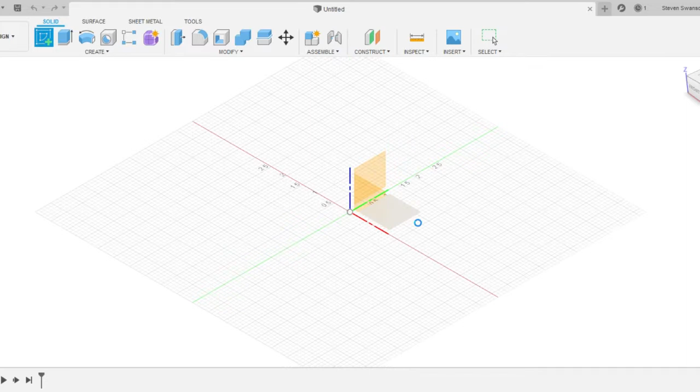Now I'm in Fusion 360. This is sped up, by the way, like 4 times because there was some lag, so this is actually slower than I'd really like. This is sped up to the maximum speed that my software allows me to.

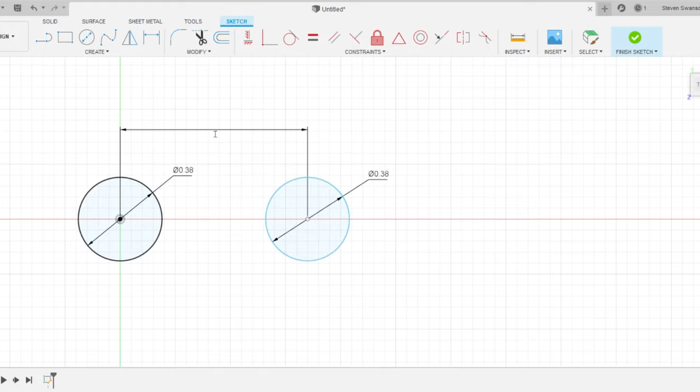And here I am making the circle, the original circle that is going to be the hole. I think I said 0.38, that's what I'll make it. You see I made it 0.38. That gives it just enough room so I don't have too much friction.

I made 2 of them because remember I'm gonna have 2 sticks, so I made the 2 holes. I put them a 1/2 inch apart, that gives them some space. I didn't really care how much space exactly, I didn't really plan that, it just looked nice at this size. So they're 1/2 inch apart, those 2 circles.

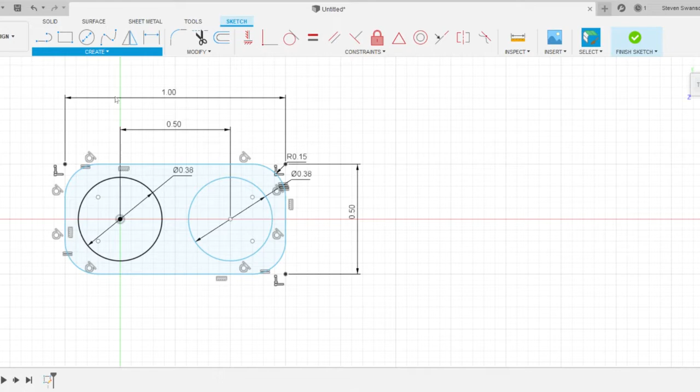I made the outside rectangle, now I'm rounding those edges. Remember that's called filleting, when you round those edges. It just looks more professional rather than a squared edge. You should always, unless you have a reason, round those corners, just like on a coffee table - they're not sharp edges, they're always slightly rounded.

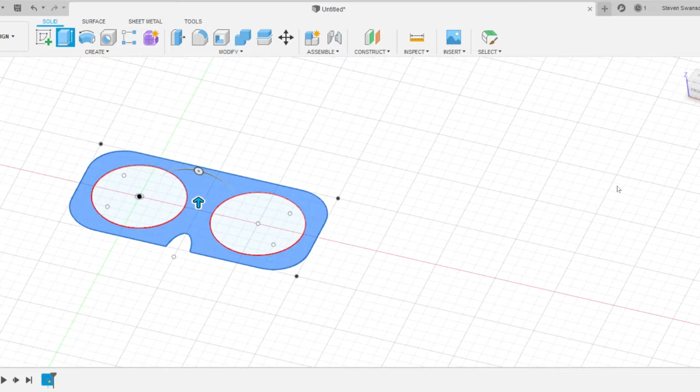Here I'm just trying to make a notch because I remember there was a groove in the middle of that little railway, so I put a little groove there. I could have measured it, I should have, but I just put it there and it just looks nice. So I put that groove, that's where the bottom is going to be.

I made it into 3D. That's called extruding, so you take your drawing and then you extrude it out, which kind of puffs it out. That's called extruding in 3D software.

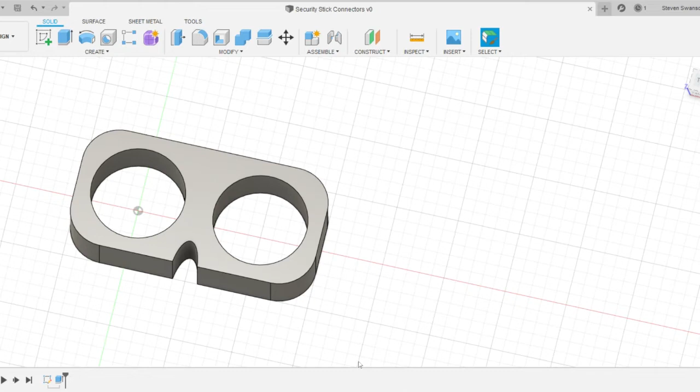And I think I'm about done. I don't think I did much else. I know I had to save it, so I think that's what I do. I have no idea what I'm doing at this point. Trying to remember why I'm spending so much time on this.

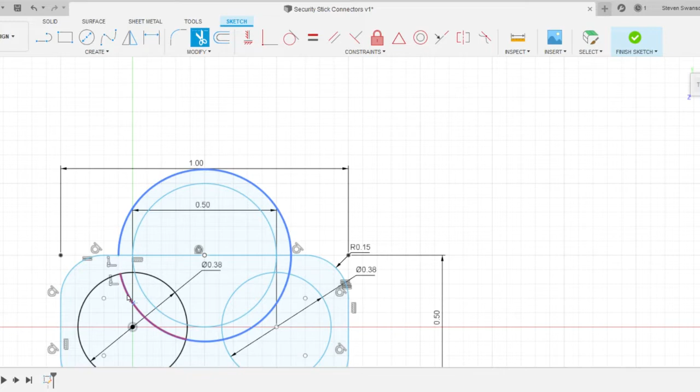Oh, I know, I had to go back and edit something. What did I do? Let's see here. Oh, no. So I saved that file, and I saved that last file as the connecting pieces. Now I'm messing with that file and doing the end piece, the final end piece.

So I'm adding that little handle on top, so that's kind of like what I was going for. But I thought, maybe I should have something that sticks out, like pops out a little bit more than just a loop. I think it ends up breaking off anyway.

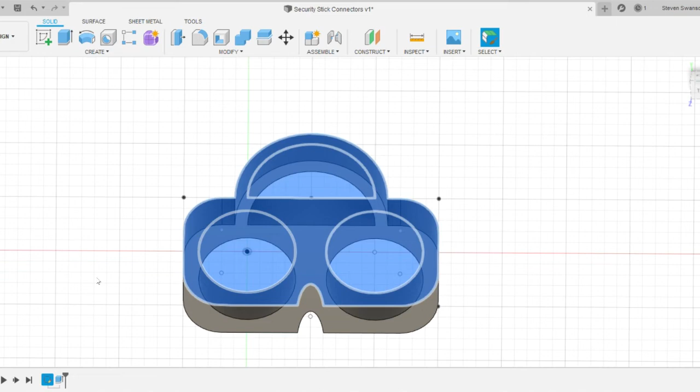It's very tiny. I remember while I was drawing it, it said it was going to be around 0.1 inches, that's 1/10 of an inch, that's not very big at all. In fact, this whole thing looks big here in the drawing. It's really small, and you'll see them in a minute when it prints them and when I have them in my hand.

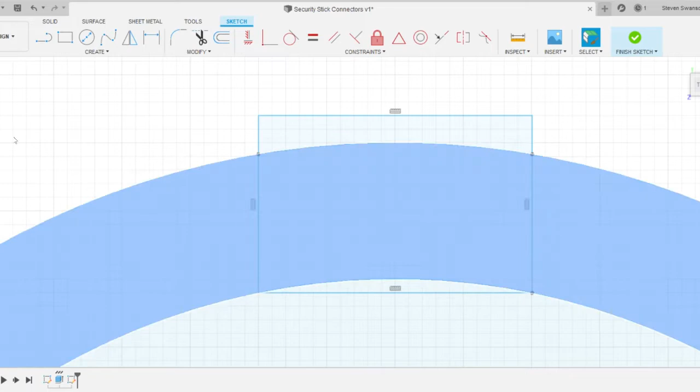You can zoom in here and they look giant, but what do they look like in real life? You have to kind of have an idea. So here I am trying to follow the exact arc. I'm not doing this cheaply, I followed the exact arc.

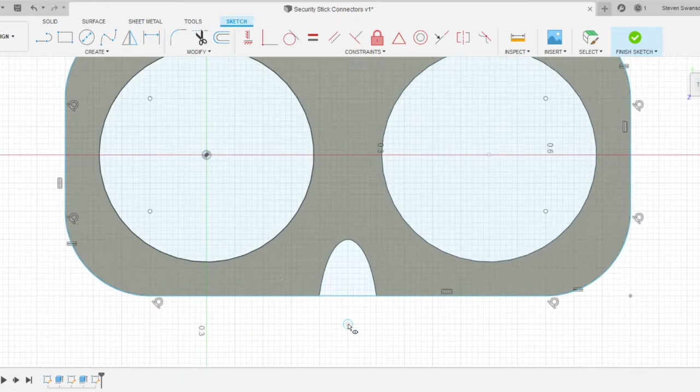Then I'm going to extrude that little piece upward right there, so it puffs up, and that's the little handle I can grab onto. I don't think it broke off all the way, maybe half of it broke or something, but it's still useful. Now I'm trying to extrude out, redrawing a plane, and then extruding out upwards to make an end.

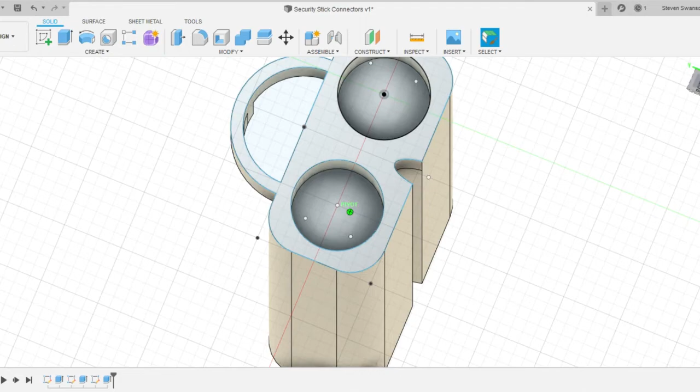This next part doesn't have the holes because I don't need it, because remember, I'm trying to eat up that extra space so people can't swing the door open with momentum. So there it is, puffed out. I think a total of around 2.7 inches — I said I was going to do 2.75, but I just did 2.7 inches.

Here I make the holes a little deeper just so I can have a bit more wood slide in, because I realize it'll grip better if I can slide the wood in deeper. So I did that, and here I'm just showing off what it looks like in 3D, rolling around different directions.

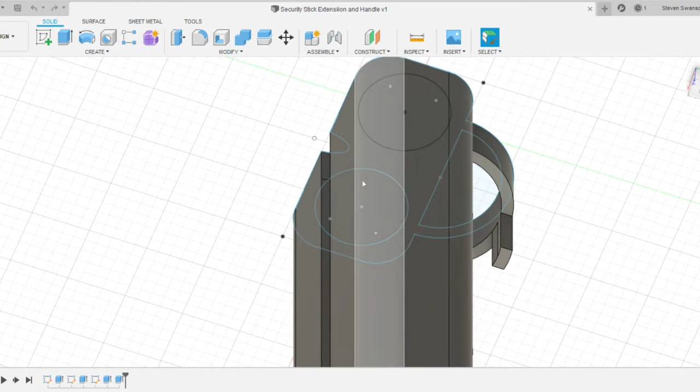I save the file, and once saved, I'm just getting a little lag on the computer. Oh, I'm saving both files. Here I'm exporting it — going so quickly. I'm exporting the files as STLs because STL files are the kind you need for 3D printing.

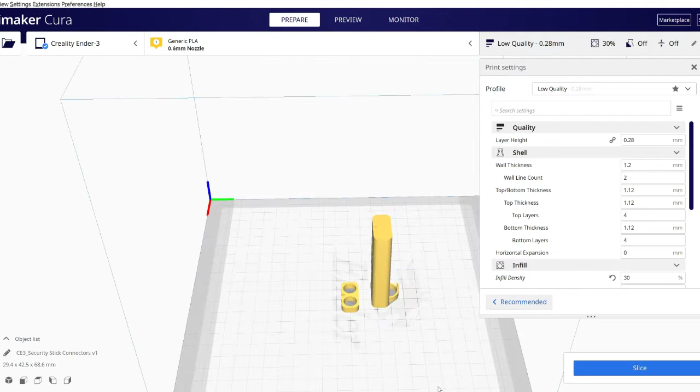So here's the 3D printing software. This is only about 30 seconds because it's sped up as well. I bring in the two files — there they are on the floor. I multiply the little guy because I need a few of those to connect the sticks together. And that's about it, I just do a couple of settings and print it with Octoprint.

That little bottom right blue button, I push it right there and activate it. Now you'll see it printed, and there it is — that's about 2 hours of printing, all done. Here's the stuff, this is what printed. You just saw that time lapse right here.

They're pretty small, a lot smaller than you would think too, but fits pretty good even over the paper right here. You get a little frictiony there, but it still fits fine — not too loose, not too tight.

I'm gonna do 3 of these and put them in the same direction here. And if you hear anything, that's just my son in the background.

And here we go — 1 on the end, and 2 like in the middle area, something like that. And then, there we go. Let's feed the second one in. This is going to be a lot stronger with 2 of them in here like this.

It also starts to get a little frictiony too. There we go, look at that, it's coming together. Let's get that one down, this one down, and then this one is a little extender.